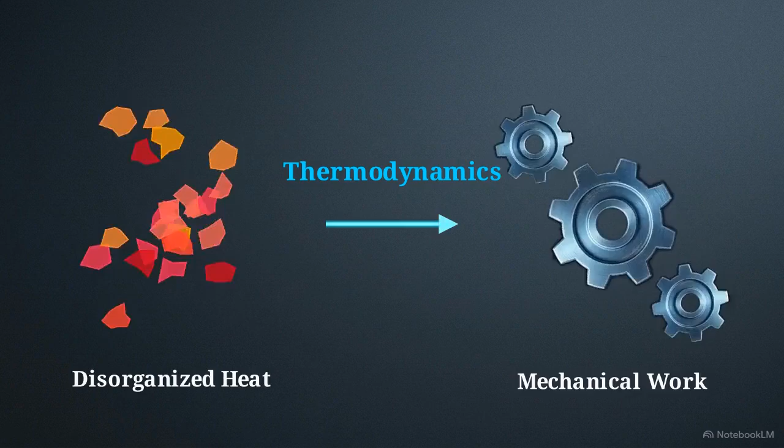That limitation remained until the development of thermodynamics, the formal science of energy transfer. The primary aim of this discipline is to take disorganized heat and convert it into a strictly organized state, mechanical work. Applying that single rule of conversion catalyzed the Industrial Revolution.

Heavy machinery could finally translate the random kinetic energy of a coal fire into the precise, rhythmic output of pistons and gears. The exact same principles govern modern engineering. The thrust lifting a spacecraft relies on managing the intense heat of combustion to generate directed, organized momentum. The ability to efficiently organize heat into work provided the mechanical leverage required to build our global industrial infrastructure.

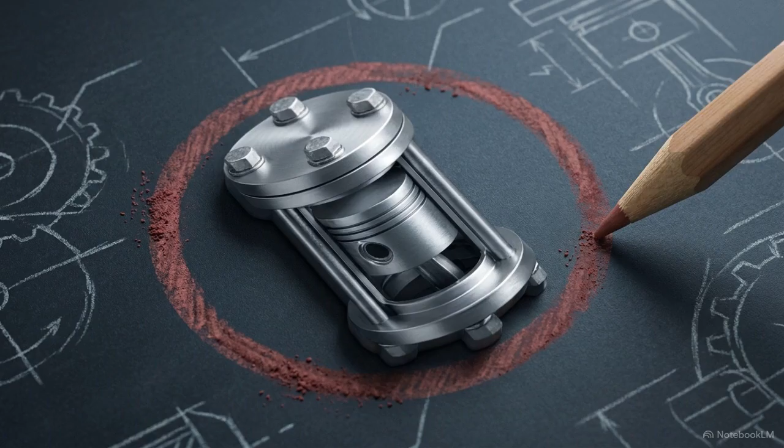Before scientists could calculate how to put that heat to use, they needed a method to mathematically isolate specific interactions. They start by defining a system, the specific region in space that an engineer chooses to focus on. Anything outside of that chosen region is classified as the surroundings.

This is where the physical effects of the system are actually felt. Separating the two is the boundary. This divider can be a rigid wall, a flexible surface, or an entirely imaginary line drawn in the air. Add the system and the surroundings together, and you have the thermodynamic definition of the universe.

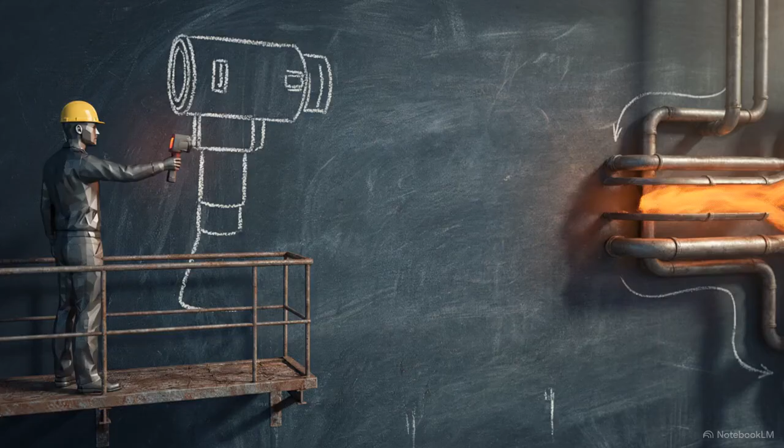By establishing these strict spatial zones, engineers can track exactly how much energy is moving from one place to another. Without these dividing lines, measuring energy transfer becomes mathematically impossible.

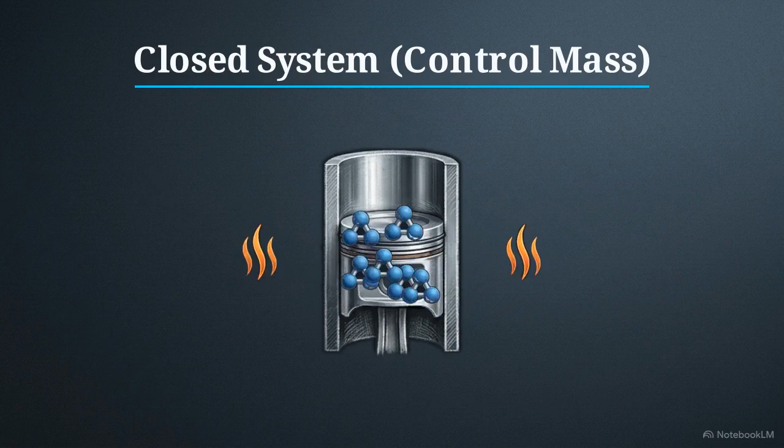Once the boundary is drawn, the system inside is categorized by what is allowed to pass through those walls. In a closed system, also known as a control mass, thermal energy and work can cross the boundary, but the physical mass inside remains constant.

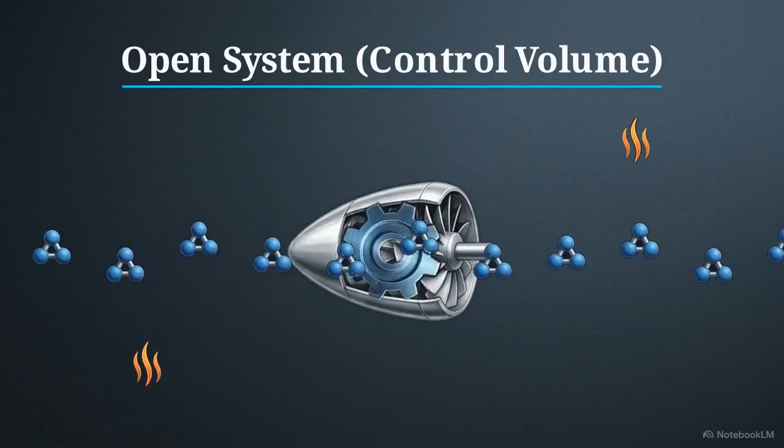An open system, or control volume, removes that restriction. Here, energy and mass are allowed to transfer across the boundary. A power generation turbine operates this way, constantly taking in high-pressure steam and ejecting it after the energy is extracted.

The third category is an isolated system. Like a perfectly insulated flask, boundaries are completely sealed, preventing both mass and energy from escaping or entering. Determining whether a machine is an open, closed, or isolated system is the first step in calculating how much work it can actually perform. To measure matter inside these boundaries, engineers rely on observable characteristics called properties.

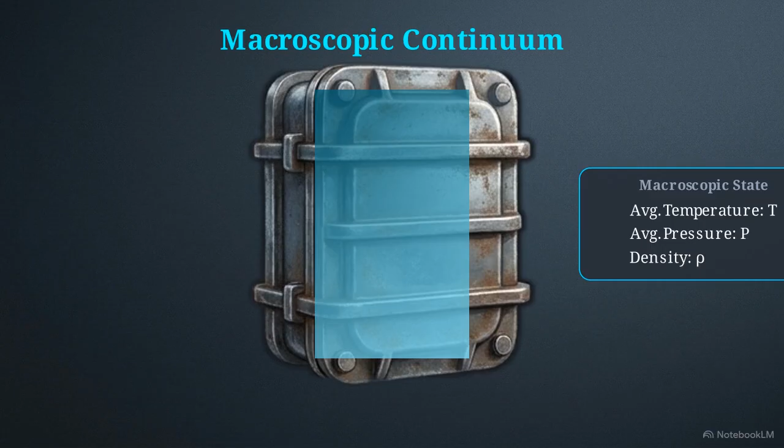At a microscopic scale, individual molecules exhibit highly erratic movement, making absolute mathematical tracking for every single particle impossible. Thermodynamics addresses this through the continuum concept. Instead of tracking billions of particles, engineers treat the matter as a uniform, continuous whole and measure the average behavior of the molecules. This macroscopic approach replaces the unpredictability of molecular physics with reliable engineering data.

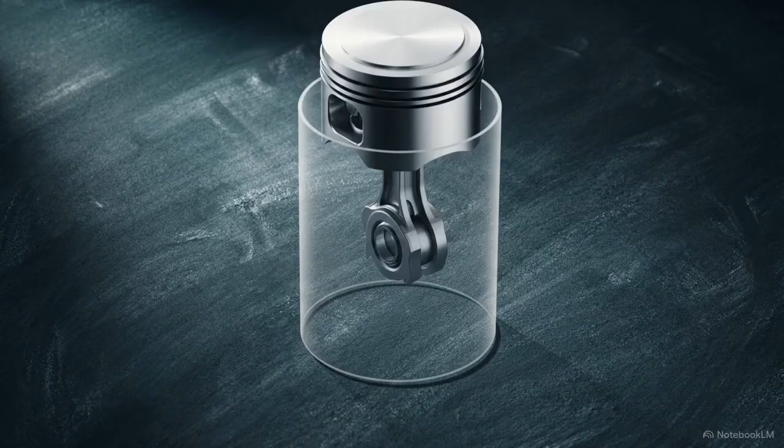A system becomes stable when it reaches thermodynamic equilibrium, meaning it is balanced thermally, mechanically, and chemically. When we apply intense heat or external work, we trigger a process, forcing the system from one equilibrium state to another. If a system returns exactly to its starting state after a series of processes, it completes a thermodynamic cycle, visualized as a closed loop.

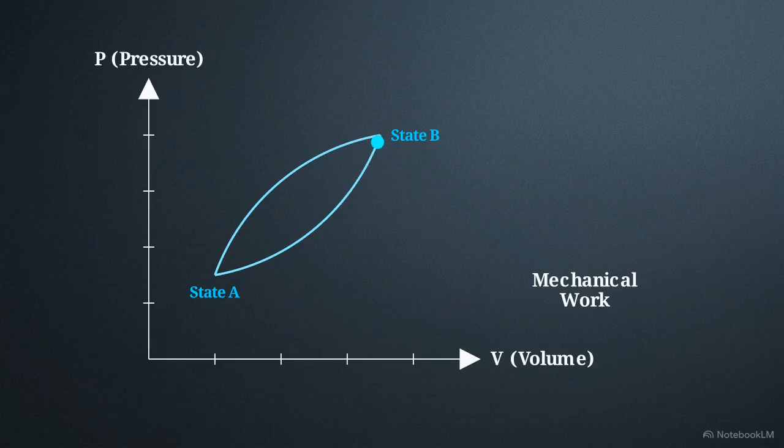Because the net change in any property is zero, this loop can repeat infinitely to extract continuous mechanical work. This endless cycle is the basis for our current infrastructure. A nuclear power plant depends on these repeating thermal processes to provide a steady, reliable supply of electricity to the entire grid. These laws establish the governing logic of the physical world. By mastering these cycles, we've learned to direct energy transfer at a planetary scale.